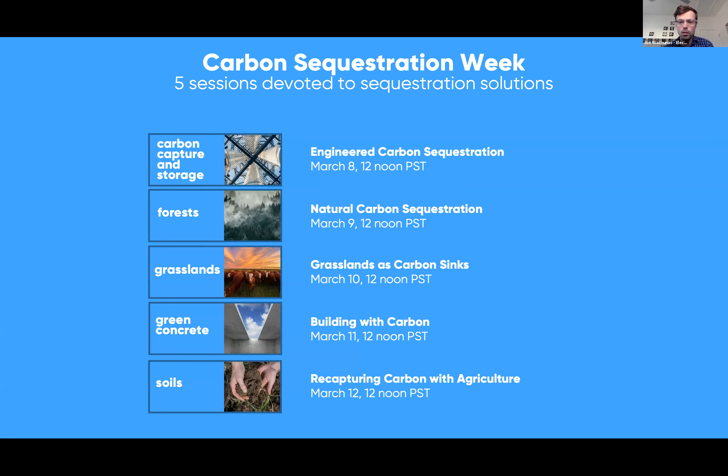I'm really excited about the panelists we have today. We've got two ready-mix suppliers pushing the envelope in terms of concrete technology. We have Michael Bernert, Vice President of Wilsonville Concrete Products, a local, family-run business experimenting with new ways of creating and delivering concrete to reduce carbon emissions. We also have Alana Guzzetta from US Concrete, the National Research Laboratory Manager, working on new ways to make concrete in service of reducing its carbon impact. And we have Alex Boetzel, Director of Operations at Green Hammer, also here in Portland, a builder doing LEED certified buildings and other green building techniques to lower energy consumption, increase efficiency, and lower embodied carbon. So I think we've got a good spectrum of speakers looking at things from slightly different angles, who can give us a great picture of what concrete looks like today and where it's going in the future.

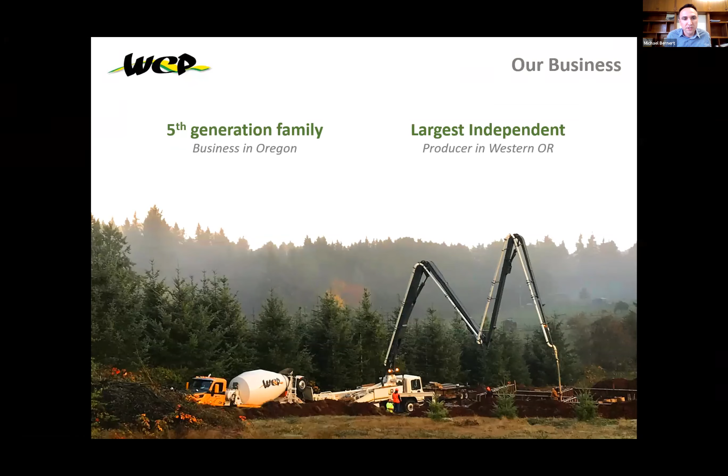Concrete is the most common building material in the world, second only to water in terms of human use, and it's everywhere. It's in our roads, our homes, our bridges. It's what supports our skyscrapers and our stadiums, and it's a versatile, strong, low cost, and long service life material.

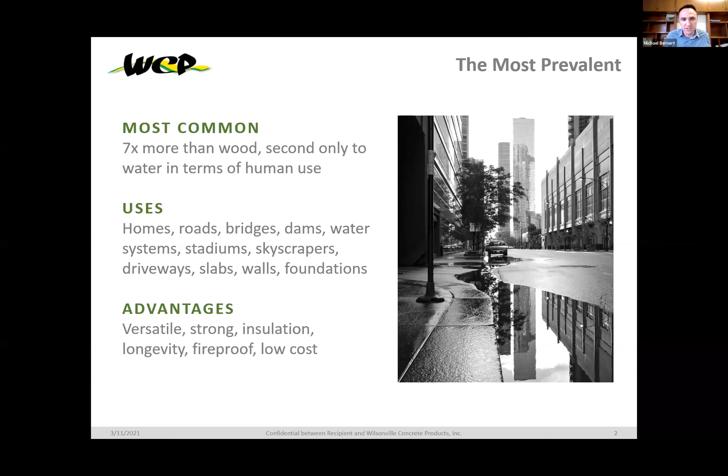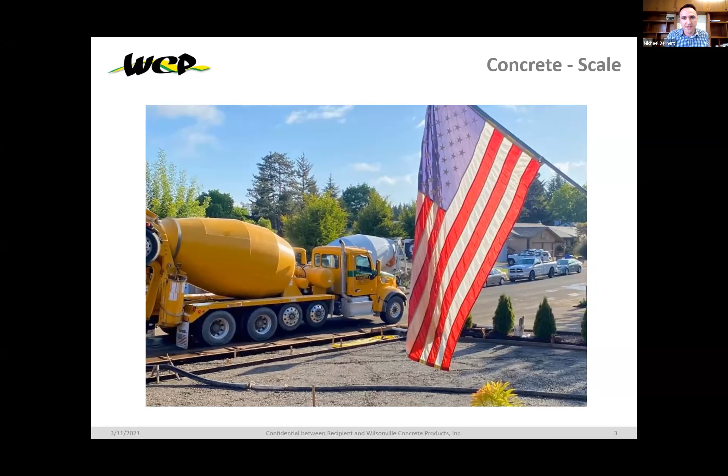Because of those advantages it's ubiquitous, and it's hard to explain the immensity of the amount of concrete we use globally. The easiest way for me to think about it is a typical residential driveway, about 640 square feet and a 4-inch thick slab. Every day, globally, we produce enough concrete to pour about 9.5 million of those driveways. That's enough concrete to cover the entire city of Portland, all the offices, sidewalks, roads, residential neighborhoods, trees, parks, and green space, in 4 inches of concrete. It's truly a mind-boggling amount, and that's just in a single day.

Globally, over a year, there's enough concrete poured to cover the entire nation of the United Kingdom. I can rattle off example after example, but it's a massive quantity of physical material.

Given that scale, it's no wonder concrete has a dramatic impact on our planet. About 70% of the carbon footprint from concrete comes from a single ingredient: cement. Cement is the binder that holds concrete together and allows it to gain strength over time. The manufacturing of cement alone accounts for somewhere between 7 to 8% of global human-caused carbon emissions.

So it's a huge part of the climate crisis, and that's why our producer community and others in the industry have a real need to take dramatic action quickly to reduce that footprint, and also look for opportunities to transition the built environment into a source of sequestration instead of a source of emissions.

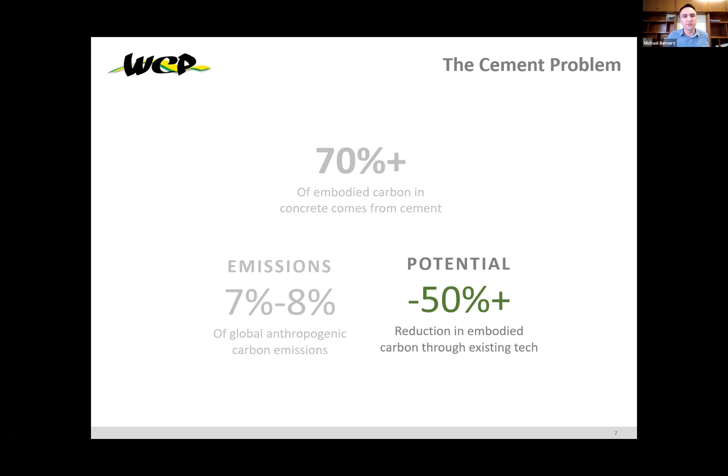We're going to talk a little bit about sequestration later, and I think Alana is going to touch on that. For now, I'm going to focus on the opportunities to reduce current emissions using existing technology. Through existing technologies available off the shelf today, there's the potential to reduce emissions by about 50%. So there's real promise in terms of tackling that 7 to 8% equation in the near term, and real opportunities in the long term to pursue some of these sequestration technologies.

Before we jump into the technology, I wanted to do a brief introduction on cement chemistry, which helps explain why cement has such a high carbon footprint. I have a disclaimer that this is a massively simplified explanation, so I apologize in advance to any engineers or chemists who may be participating.

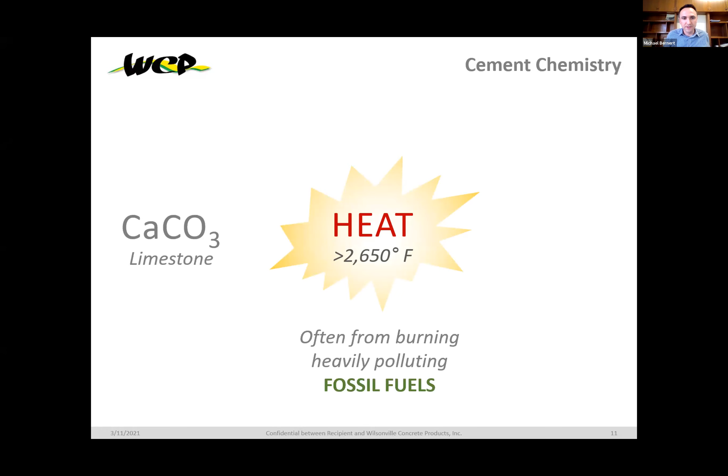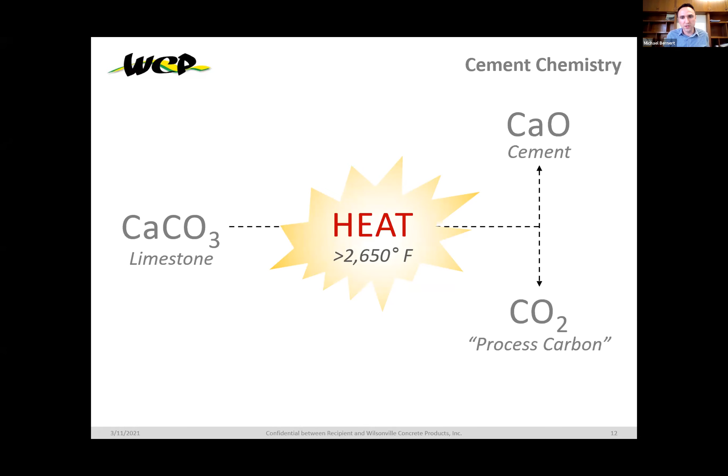At the simplest level, cement is made from limestone, or calcium carbonate. That limestone is heated up in a cement kiln to over 2,650 degrees Fahrenheit. Most of that heat comes from the burning of fossil fuels today, which is a significant source of carbon emission. The heat creates a chemical reaction which produces cement, but in order for that chemical equation to balance, it also creates what we call process carbon, even more CO2 pollution. So cement has such an outsized impact because of the burning of fossil fuels, coupled with the industrial process itself being a source of additional carbon emissions.

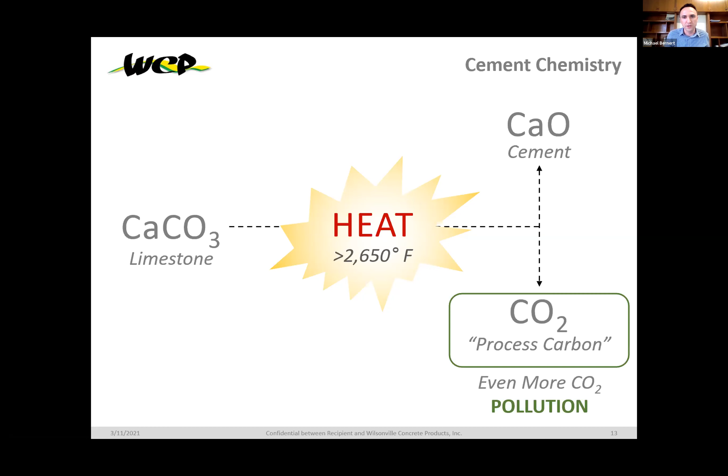As we look as an industry on how we can tackle that problem, we have to pursue an all-of-the-above approach, attacking emissions and looking for sequestration opportunities throughout the life cycle of concrete.

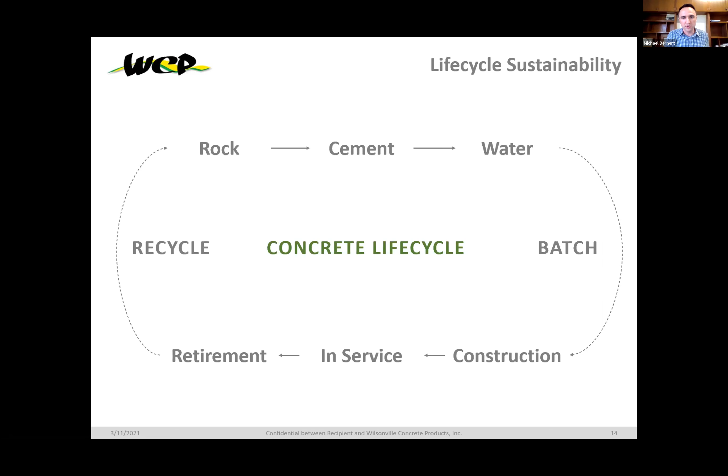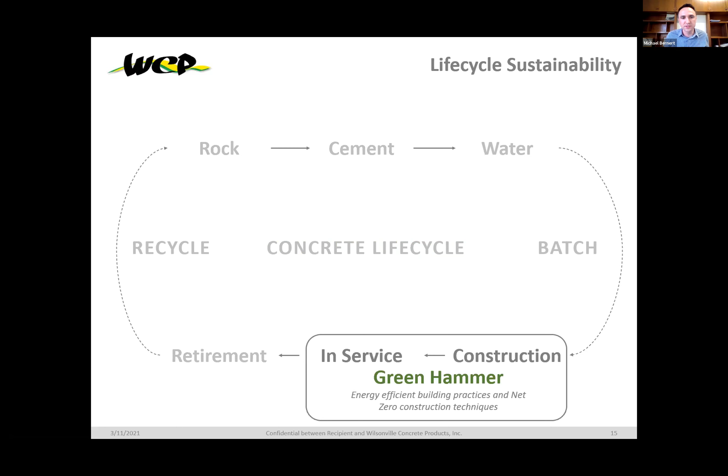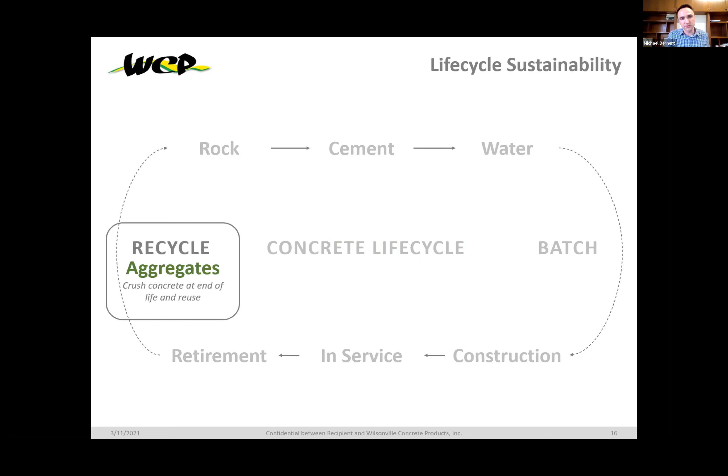Alex and his team at Green Hammer are experts in constructing structures and placing them in service in such a way as to reduce their carbon footprint. I think he's going to speak in his presentation about that area of the life cycle. There are opportunities through recycling buildings when they're being decommissioned to turn that concrete into new material to reduce demand, and we can recycle that concrete and turn it into new aggregates.

One of the opportunities that Alana is going to speak to is Blue Planet. Blue Planet is a technology where carbon dioxide is used to make synthetic aggregates, and then those synthetic aggregates are placed into the concrete—that's a true sequestration opportunity, which permanently sequesters carbon dioxide into our built environment.

Alana's also going to speak to Carbon Cure. Carbon Cure is an opportunity and a technology to inject carbon dioxide into the concrete batching process, and again, permanently sequester that carbon dioxide into the built environment.

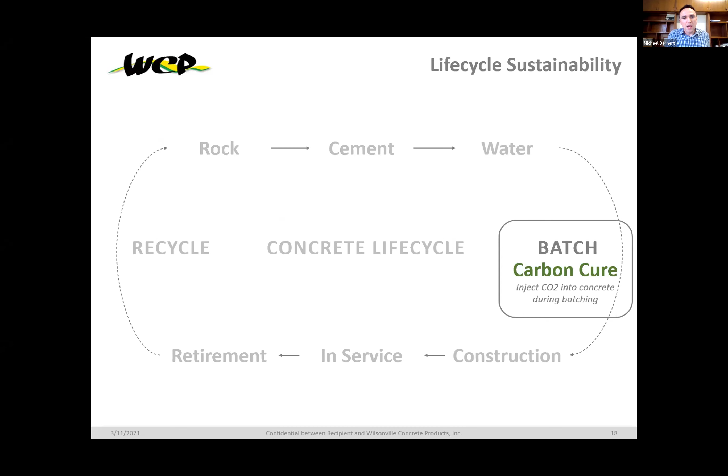Carbon Cure and the Blue Planet technologies are emerging and reaching commercial scale. In the meantime, there are things we can do today to significantly decrease the cement that's in our concrete mixtures. So taking cement out of concrete is one of our biggest opportunities to reduce emissions today.

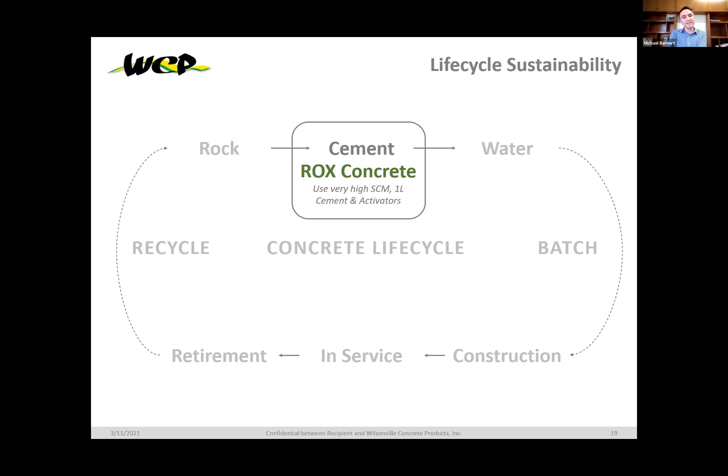In our company, we launched a product line called ROX Concrete, and it uses what are called supplemental cementitious materials, in addition to a very specific type of cement called Type 1L cement, to take cement out and replace it with supplemental cementitious materials.

We currently have two products that we sell. One is called Steel ROX, which uses a byproduct of the steel manufacturing process as the primary SCM, and it reduces the cement content by about 50%. I think Green Hammer uses this product in a number of their recent structures.

We're also starting field trials this year with a product we're calling Clean ROX, which reduces the cement content by 75%. It uses a slightly different technology called alkali activation to help those SCMs gain strength at such a high level of substitution.

Both of these products, and our entire ROX Concrete offering, are carbon neutral. This was a challenging decision for us to make in terms of, are we just paying to pollute? I'd welcome a discussion during Q&A about how to think about carbon offsets and how we came to the conclusion that it was the right decision. But that is part of where we're moving our company in terms of purchasing those offsets currently.

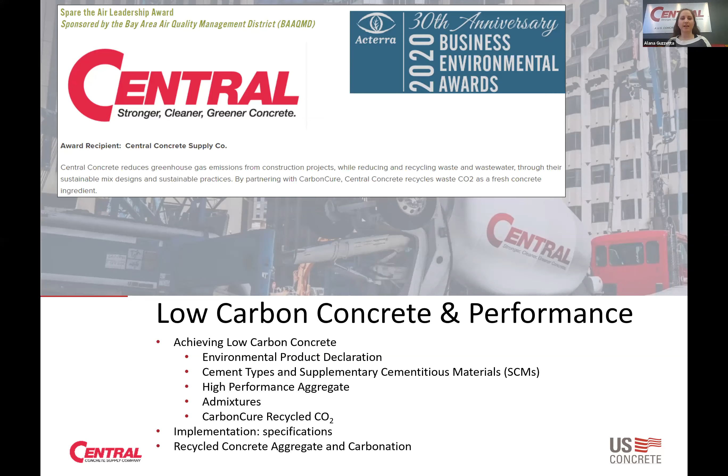That's specific to the mix design batched at a specific plant. As a ready mix producer, we have operations in different parts of the country, but say specifically in the San Francisco Bay Area, we have 19 different plants. What this takes into account are all the raw ingredients that are in the mix and what it took to transport them to the plant where the concrete is going to be mixed. So that's how an EPD is going to be specific to a mix design batched at a specific plant.

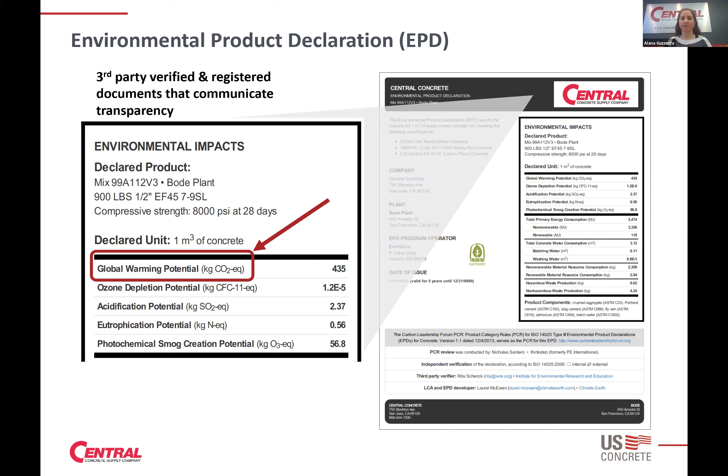So that EPD is taking into account what was the processing emissions for each of these ingredients, what was the emissions attributed to the transportation of these ingredients to the concrete ready mix producer plant, and then what energy and emissions go into mixing all together and producing the concrete at the supplier's plant. I'll be referencing this page to go through what the impact and the ability to lower the embodied carbon of the mix is for each of these ingredients.

Looking at the mix overall, this is a breakdown of the GWP for three different mixes, and looking at where the majority of that embodied carbon is coming from. As Michael said in his presentation, it could be about 70% comes from cement.

In this specific breakdown, we took a look at three different mixes. The dark gray bars are a 100% cement mix, meaning the only powder in the mix is Portland cement. The red bars are for a 15% fly ash mix, meaning 15% of the cement is replaced with a different powder we call fly ash, which is a byproduct of burning coal and a waste product that would otherwise be put into a landfill. The light gray bars are from a 50% cement replacement mix, where we're using a blend of supplementary cementitious materials that Michael talked about.

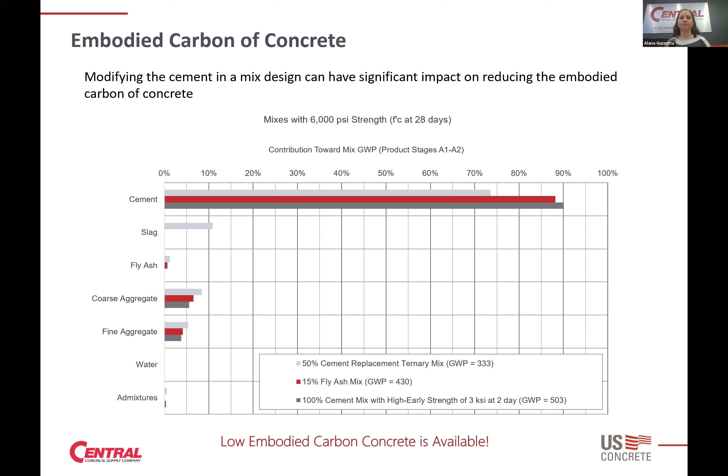With a 100% cement mix, where cement is your only powder, in this specific mix example, 90% of the GWP for that mix design comes from the cement. As you start replacing that cement, it becomes lower. So you're anywhere from about 70 to 90% of the embodied carbon in the mix coming from the cement. So if we take a first look at cement, what are our options for reducing the embodied carbon of the mix?

One thing is looking at the type of cement you're using. Michael talked about this, that they are currently using a type 1L cement, which comes from a different ASTM standard. A lot of the cement that's more common is an ASTM C150 cement. Different parts of the country use different types. Specifically in California, we're using a type 5 cement, where the chemistry is such that it can be more resistant to sulfate attack.

If you have a cement that meets C150, it can contain 5% limestone, meaning limestone that has not gone through the kiln and is blended in with the cement product that has been processed through a kiln. But a C595 cement is a blended cement, so that allows for a higher amount of limestone, up to 15%. Commonly we see cements having 13 to 14% limestone. This reduces the embodied carbon of your mix by about 7 to 8%. If you're taking a C150 cement and pound for pound replacing it with a C595 cement, that's going to result in about a 7% reduction in your GWP for the mix.

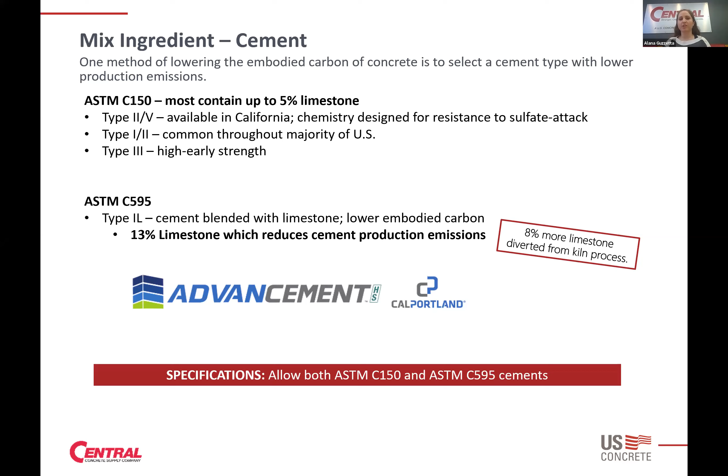So then moving next into the mix design, the supplementary cementitious materials - these can be a variety of products. They're just different powders that can replace the cement in the mix. We'll go through some of the options there.

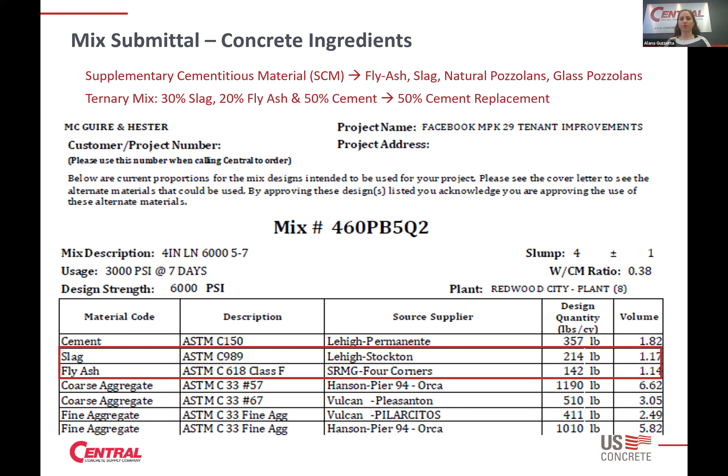But first, understanding - going back to that chemistry equation that Michael was talking about - the calcium silicates are coming from your cement and they're mixing with water. That chemical reaction is called hydration. What you get as a result is something we call CSH, calcium silicate hydrate, which is that strong paste product that's holding everything together, holding the rock and the sand and all the powders. That chemical reaction is what makes it go from a liquid state to a hard concrete and build strength and density of that material. A byproduct of that reaction, also mixed in with that paste, is free lime or calcium hydroxide.

The benefit of supplementary cementitious materials is that some will have a little bit of reactivity with water on their own, but the majority of what they're doing is reacting with that calcium hydroxide, that weaker product, reacting with that and water to form more of that CSH, or that strong part of the paste. So that's going to increase the strength of your concrete and also make it more dense.

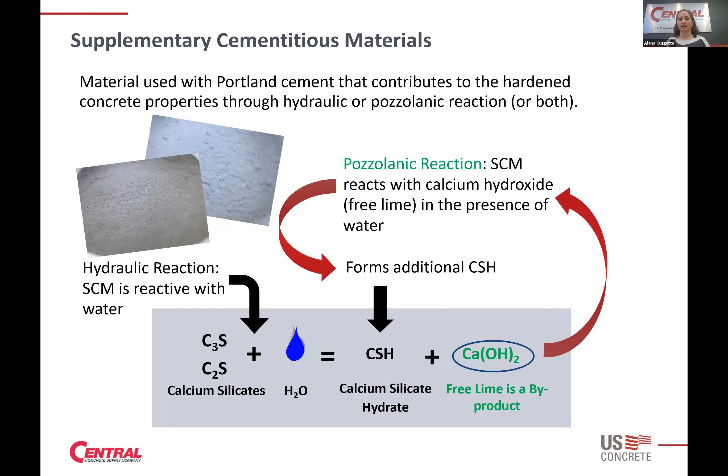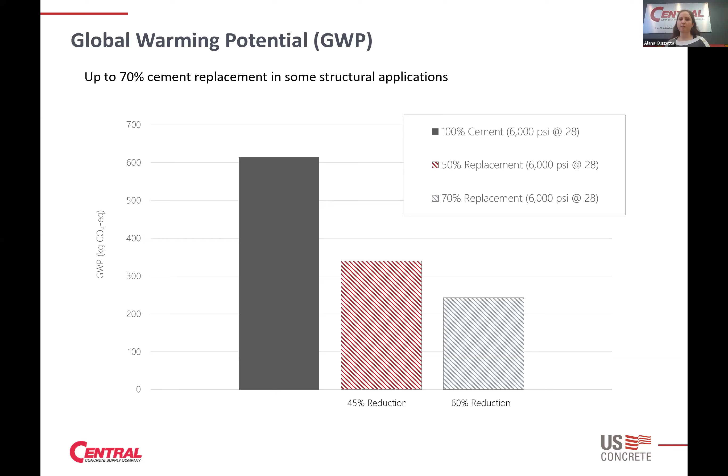In an example of how embodied carbon can be reduced with these types of products: this is a 100% cement mix that achieves 6,000 PSI at 28 days, with a GWP of just over 600. With a 50% cement replacement mix achieving the same strength, there's a 45% reduction in the GWP. With a 70% replacement of cement at the same strength, we were able to achieve a 60% reduction. These are mixes we're able to use out on the market in the San Francisco Bay Area, also in our East Coast operations today.

This is an example showing field compressive strength, where the gray bar is a mix with a higher GWP - 15% cement replacement - compared to the red bars, which is a 45% cement replacement mix with a lower GWP. With this, you're seeing that we don't have to sacrifice performance of the material in order to have this lower embodied carbon concrete.

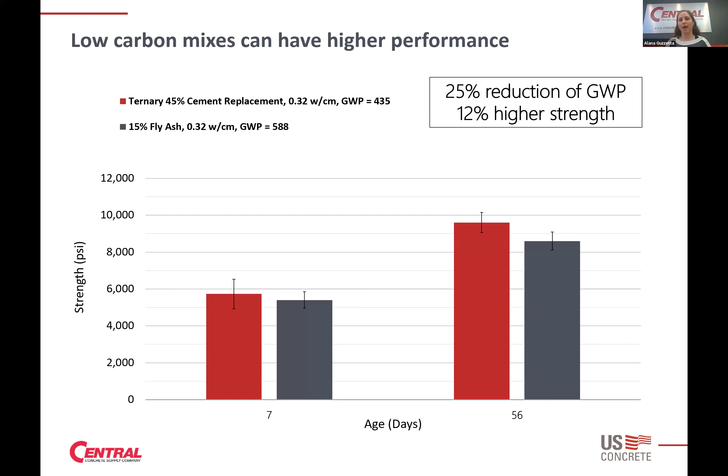Supplementary cementitious materials very commonly today are fly ash and slag. Slag is a byproduct of steel manufacturing, as Michael mentioned. One new one available on the market now is glass pozzolan, which has a new ASTM standard specifically for it.

That standard just came out, I think it was about last year, maybe 18 months ago. The only glass pozzolan source that I'm aware of right now is in the New York area. It's something we've used in the lab for the last 5 years or so.

In New York, we've used it successfully on several projects and used it in combinations with other supplementary cementitious materials.

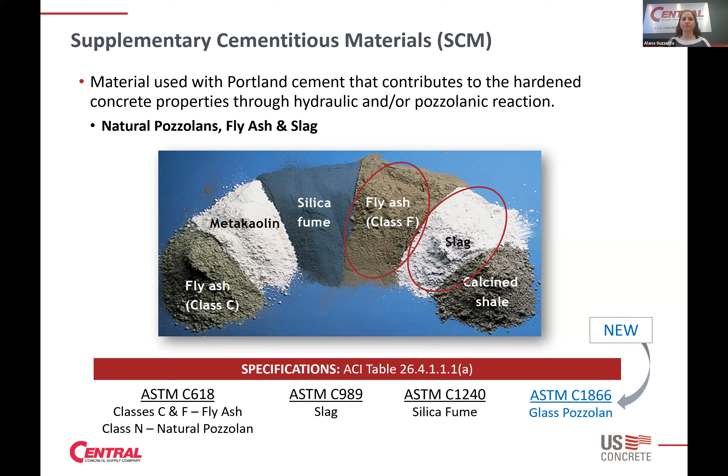You're going to find that about 60 to 70% of the volume is made up of your aggregates, your coarse and your fine together. So while cement is a significant portion of the embodied carbon, the aggregate is a significant actual product in your concrete mix.

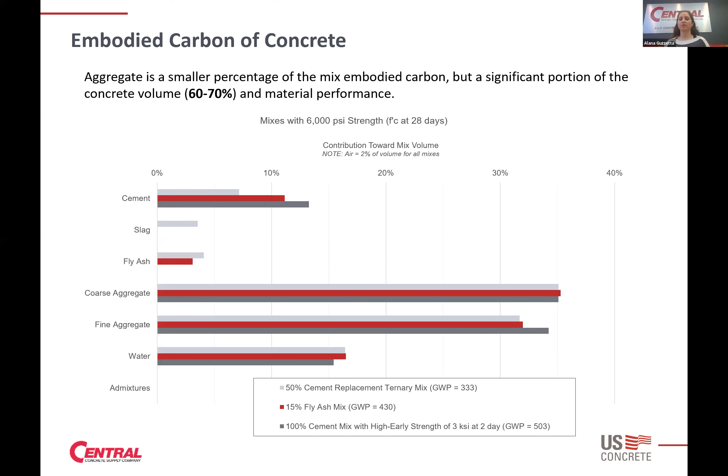There are a variety of different aggregates available and a variety of different reasons you would choose them. You can have high strength or high performing aggregates, which means you're able to achieve higher strength concrete, lower shrinkage, which is important for helping to mitigate cracking potential.

And then also have a higher modulus of elasticity, or a higher stiffness of the concrete. Your typical standard gravel aggregates, local to our area, are going to achieve 3,000 to 5,000 PSI concrete, and you'd go to the higher strength aggregates for anything above that.

There are also lightweight aggregates available for reducing the weight of a structure, reducing the weight of the concrete. There are different options available. A natural lightweight, something like a pumice or a scoria, is going to have a lower embodied carbon than a manufactured lightweight.

Manufactured lightweights are things like expanded shale and expanded clay, and those are manufactured by going through a kiln process. So that's what gives them a higher embodied carbon.

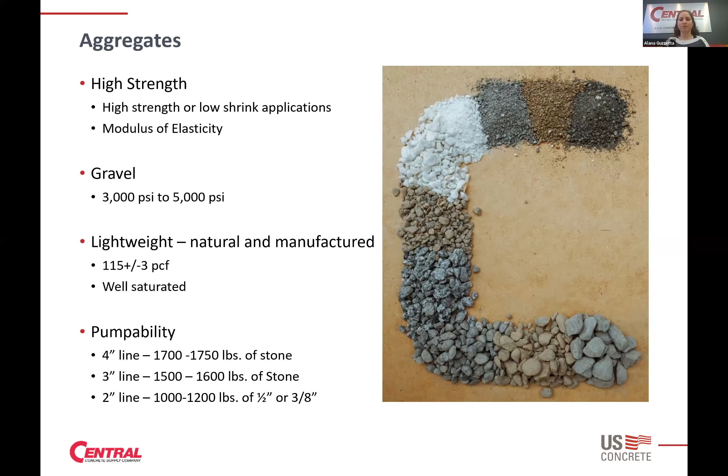And what you have available in different markets is going to vary based on your location and the sources you've got close by. But those are conversations you can have with a ready mix supplier.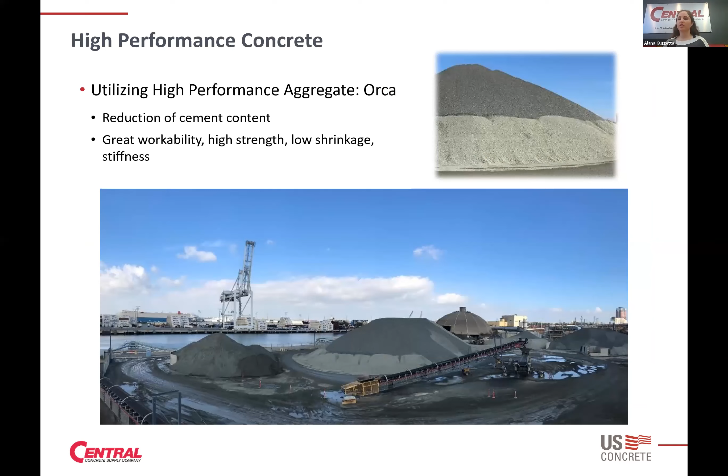A specific type of high performance aggregate is Orca. This is a US concrete aggregate that we have out of British Columbia, Vancouver. And this is an example of what we're able to do with that.

We're able to get cement efficiencies with this type of aggregate, and better efficiencies mean that we can lower how much cement is in the mix. And if you recall from previously, the cement has the highest embodied carbon in the mix.

So being able to lower how much cement content you need in the mix is going to further reduce the embodied carbon of your mix.

For the example you see here, there are three different types of mixes. We've got one example with our Orca aggregate for each one of those, which are the red bars. And then the black bars are a local kind of standard quality gravel.

What you can see is that we're measuring cementitious efficiency in terms of PSI per pound. And we're above 10 PSI per pound by using the Orca aggregate.

We're within the 8 to 9 PSI per pound range with a different aggregate. So with that, the Orca mixes are going to require less cement to achieve the same compressive strength.

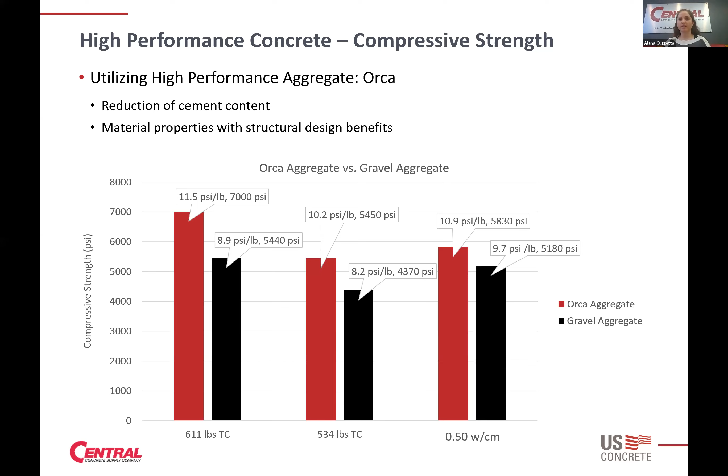So the next on the list are going to be admixtures. This technology has been developing over the decades, and some of these technologies have been around for a while and been very commonly used.

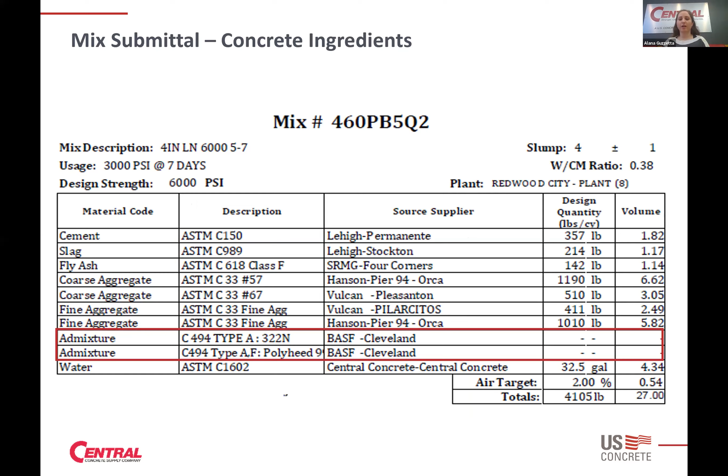With admixtures, you're also able to improve your cement efficiencies as well, that PSI per pound, and you can reduce the amount of water that's needed in a mix.

And there are even newer admixtures on the market now that actually help to give a strength boost. So that's another way to achieve the strength you're looking for and do it with less cement in the mix.

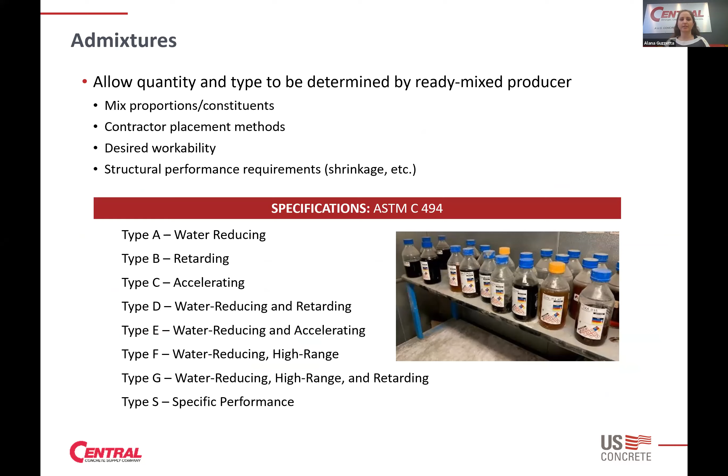As Michael mentioned, CarbonCure is the newest technology or ingredient we have to work with in ready mix concrete. CarbonCure is a technology that injects recycled CO2 into the fresh concrete. This is the first technology available to inject CO2 into ready mix concrete.

We have this in both our San Francisco market as well as our Washington DC market, and we've been using it for a couple of years. A great benefit is that it's not going to change the appearance of the concrete to the contractor, so the workability and everything you see as a fresh property stays the same.

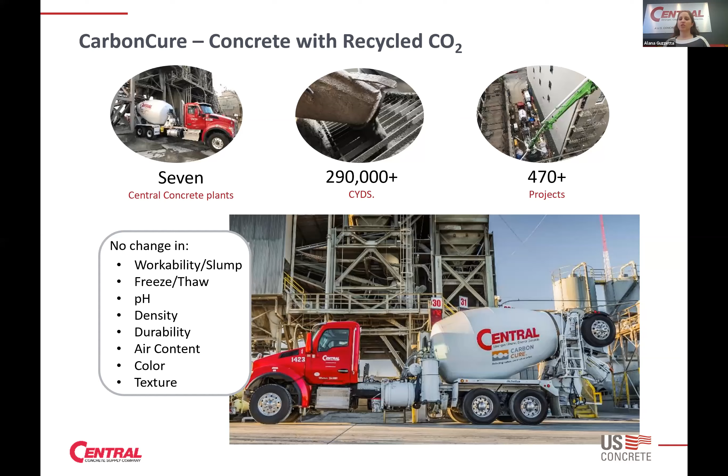The way it works is when you inject the CO2 into the concrete mix, it turns into carbonic acid and reacts with calcium ions from the cement, forming very small size calcium carbonate - that's what Michael talked about as limestone. These very nano-sized limestone particles help promote the hydration to react a little more early on, and at the right dosage, give a strength boost to the concrete. With a strength boost, you have potential to further reduce the amount of cement in the mix.

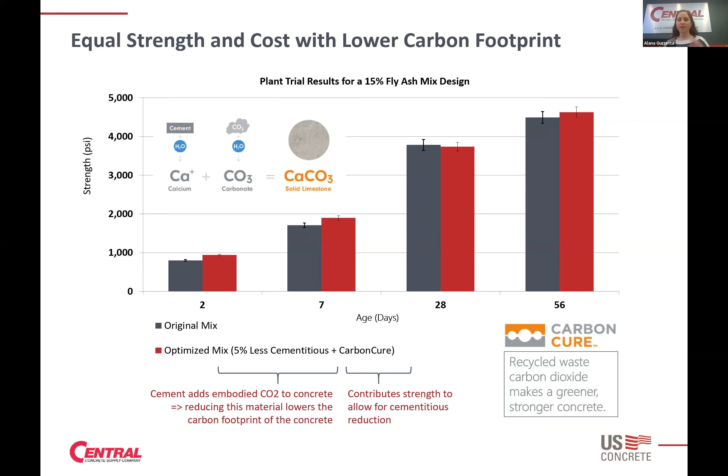This is something we've done successfully in both of our markets. Particularly, we have it available at 7 different plants in the San Francisco market. In 2019, we were able to do a mat slab delivering out of 6 different plants for over 7,600 yards in just under 11 hours, producing at a rate of 750 cubic yards an hour.

The amount of sequestered CO2 is about 0.5 pound to 1 pound per cubic yard. With this, we're able to look for opportunities to optimize the mix and further reduce the amount of cementitious material.

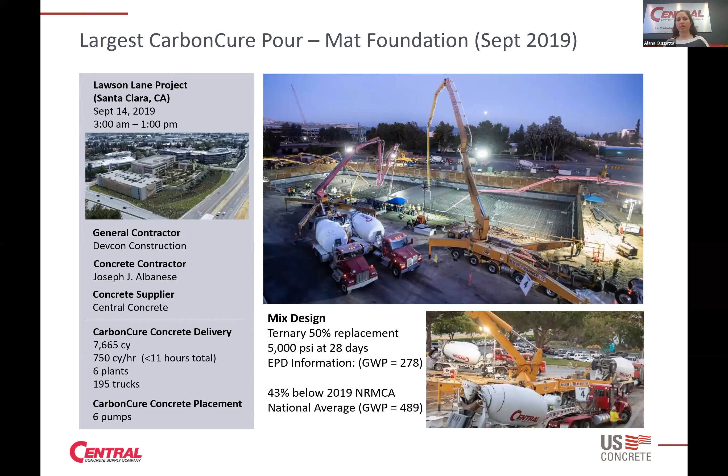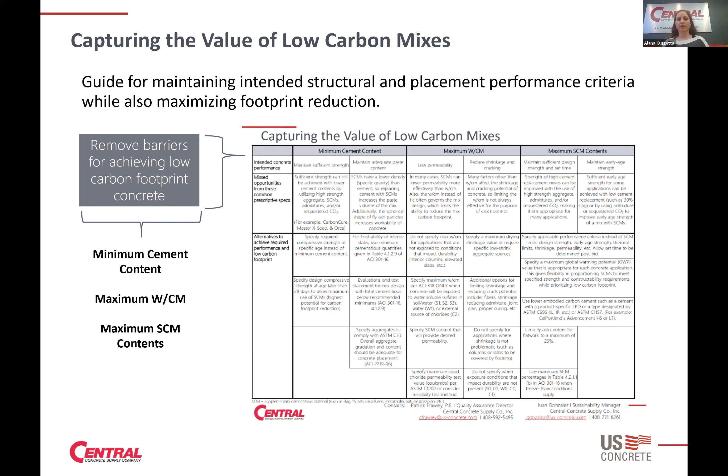This shows an example of water cement ratio. If that's limited at a pretty low number, lower than what's needed for the strength required, you're actually pushing up the embodied carbon of the mix, unnecessarily in a lot of cases. This shows 4 mix examples at a 0.45 water cement ratio, and when you look at those same 4 mix examples at a 0.50 water cement ratio, there's about a 7 to 12% reduction in the embodied carbon of those mixes.

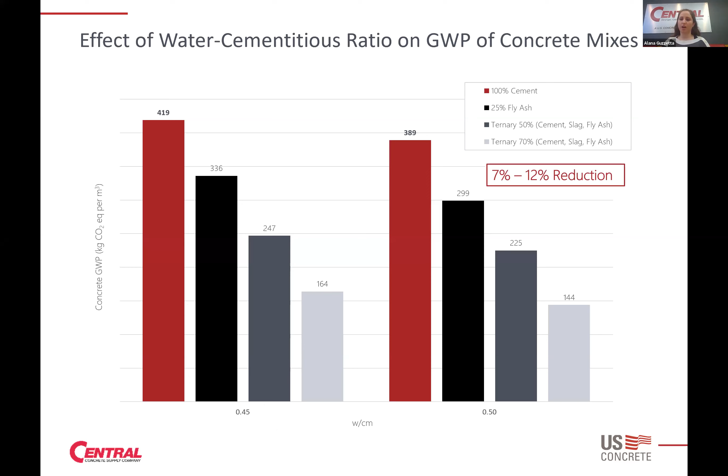With recycled concrete aggregate that Michael mentioned, this is another benefit to concrete in that when there's a waste material or leftover product at the end, it doesn't necessarily have to go to a landfill - it can still be used in a variety of ways, and one of those ways is recycled concrete aggregate.

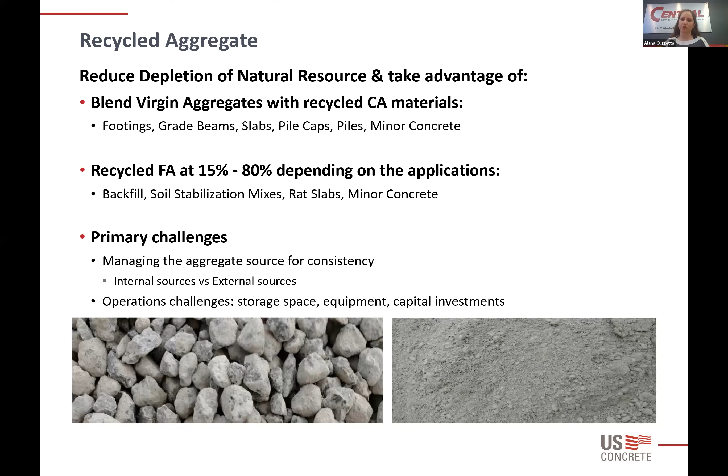One of the challenges is managing the source, so you get a little more variability in that type of aggregate, and making sure you're managing that to have predictable performance in concrete is important. Concrete can be turned into recycled concrete aggregate, either as demolished concrete from a structure or as fresh concrete that gets returned, left over from a project, that can be laid out on the ground when it comes back to the yard, then taken and crushed into an aggregate to be used in a new concrete mix later on.

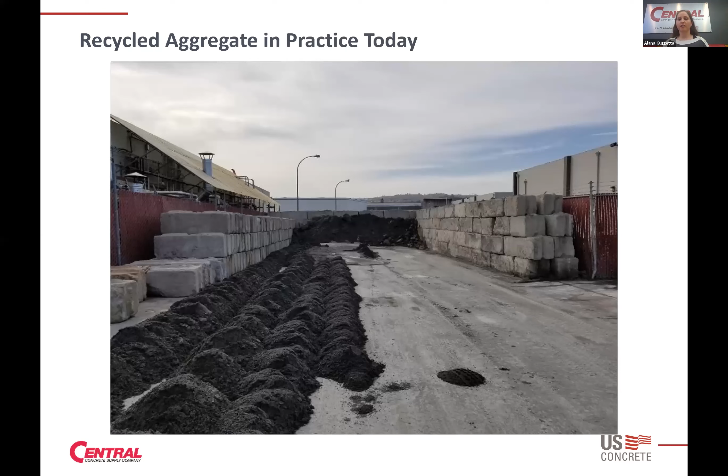This shows the variability you can get with recycled concrete aggregate - some pieces will have a high mortar content, some will be loose aggregate loosened from the crushing process. Making sure you're managing the source, as long as you're doing that well, it's something that can definitely be used into new concrete with a lot of good quality.

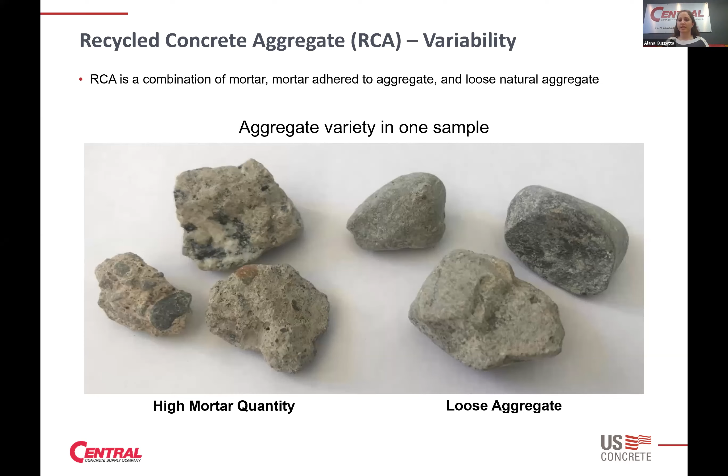Also, concrete naturally, when it's hardened, will absorb CO2 from the atmosphere and produce a carbonation reaction. So concrete itself also sequesters CO2 from the air just naturally, and when you take it and crush it into an aggregate like this, that exposes more surface area and helps draw even more CO2 out of the environment.

This is a summary that I'm happy to share with anyone, showing where different strategies we've talked about today work best for different applications. The importance of this slide isn't necessarily the specifics, since those vary by market and ready mix producer, but how important communication is between the ready mix producer, the design team, and the contractor to put together a mix design that's as low carbon as possible while achieving the structural properties needed by designers and accommodating the contractor's schedule and placement needs.

So with that, going into the contractor's piece, I want to hand it over to Alex.

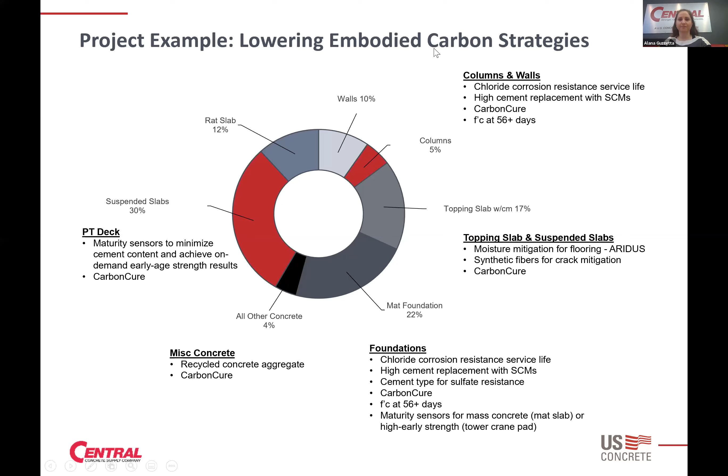All right, well thanks Alana and thanks Michael. Let me cue up my slides here. Obviously there was a lot of technical information, awesome information in there, and most people are going to want to review the slides afterwards to make sure they really catch all of the detail.

The perspective I bring is that we talked a lot about reducing the carbon footprint of concrete, and as we're waiting essentially for a lot of the carbon sequestering opportunities to come out of the labs, I wanted to bring the perspective of our practice. I'm with Greenhammer, a small design build firm in Portland, Oregon.

To bring this into context with embodied carbon, I wanted to take a little time to talk about operational carbon, which is really what most people have in the past looked toward reducing carbon emissions. So what we've built are projects like these, small multifamily projects that are zero energy.

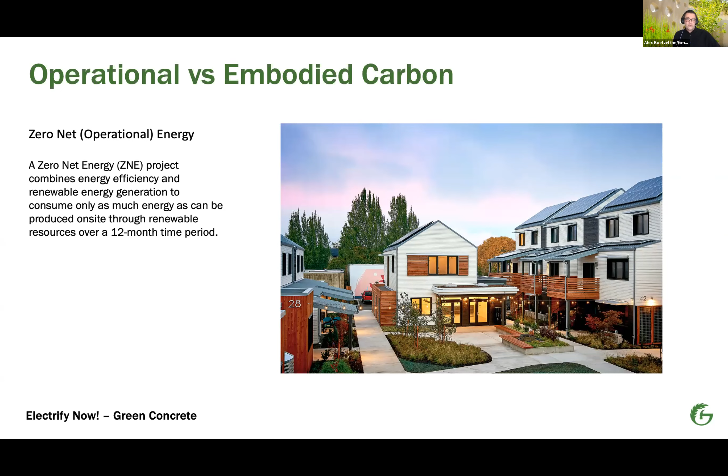Here's a little definition: the projects produce as much energy as they use over the course of the year, really dramatically reducing operational carbon essentially to zero.

So how do we do that? Just real quick, we build a high performance enclosure, we use high efficiency systems, and then on-site renewables take care of the rest.

In addition, we're looking at policies that local jurisdictions like the City of Portland and Multnomah County have, to decarbonize the grid. So pretty soon our operational carbon is going to go to zero.

And this is where the embodied carbon of materials becomes more and more important. Initially we were thinking to focus on operational carbon, which we did, and we had huge successes. So this is really our next frontier in a practice like ours.

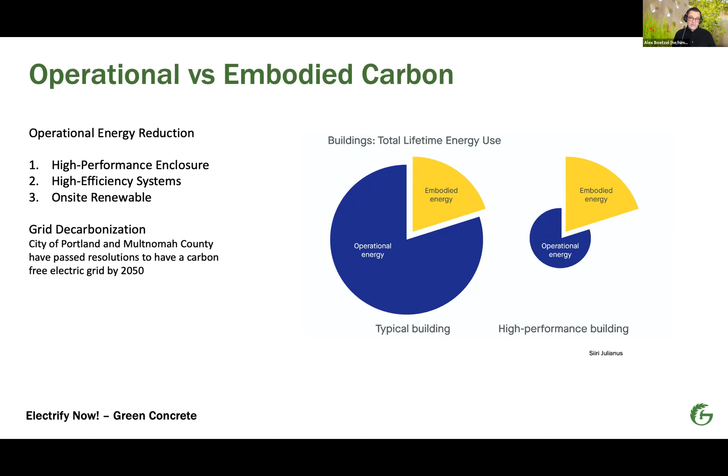What that means is we were really interested in looking into how our buildings perform in terms of embodied carbon. You can imagine that for zero energy projects there's additional embodied carbon, from additional insulation materials and a PV solar array.

We were interested in this idea that we're really shooting for zero emissions by 2030. So obviously a building like this is going to save energy over its lifetime, which might be 100 years or more. But what we discovered in this analysis is that a zero energy building actually shows carbon savings after just a year compared to a code building.

So that was encouraging, that our additional effort to create a zero energy building doesn't take 10 or 20 years to pay back, so to speak, in embodied carbon. But as we've been talking about, concrete is still our most carbon intensive product.

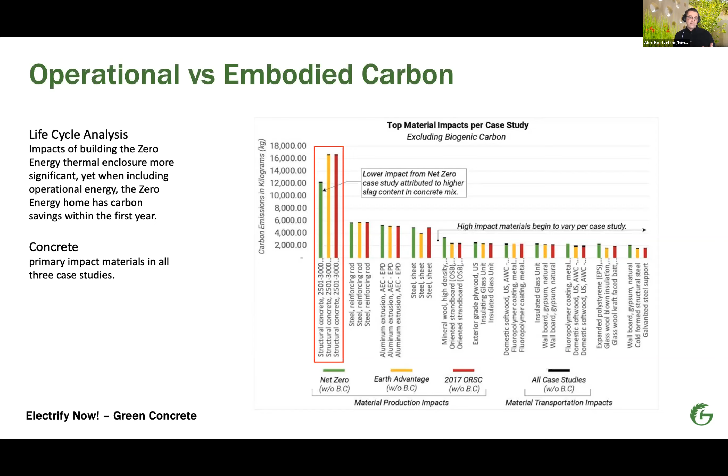So what I want to talk about, and maybe this applies to somebody else's practice too, is how do we make that change? What are the implications in the field?

What we're finding important is that we have to find the right partners. If you talk to your concrete suppliers, you have to talk about your goals, and bring the supplier into conversations like the one Michael and Alana just had, because they can really inform the conversation.

Ask for SCMs—that's the term of the day, I guess—and ask for EPDs. EPDs are important; as Alana was saying, they're like a nutrition label for materials and embodied carbon.

So please ask for those materials. There are other materials you can start asking for. Not every industry has these available yet, but if we ask for it, we're going to get more of those.

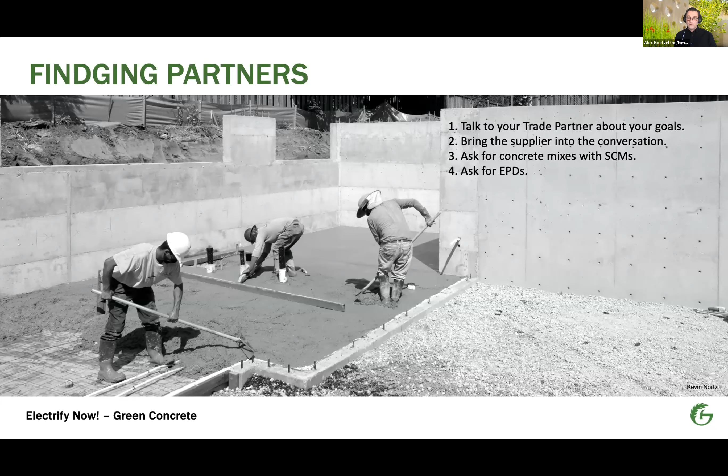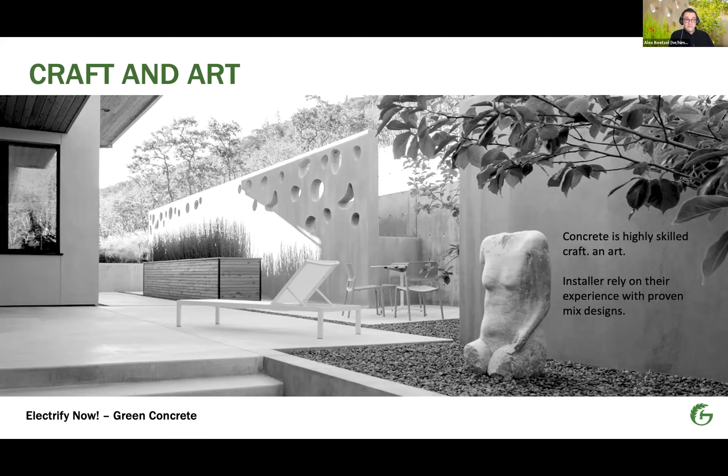One thing that's important to point out is that there's an art and a craft behind installing concrete. This might sound flippant, but changing the mix design of a concrete could be equivalent to changing the family recipe on a holiday dinner. They have decades of experience with certain mixes, what they can do, how they perform, where their strengths lay. So changing specifications is going to be important, but there will be hesitation from trade partners to change their practice. This is going to be a slow educational process, and it has to be collaborative to really change the industry.

The other way this impacts our concrete trade partner has to do with time. Some of these mixes perform a lot better over time, like Alana was illustrating so well just before. But there are also aspects, particularly for smaller projects and smaller concrete installers, that really matter.

For example, form removal times. Some concretes might be stronger over time, but the initial strength that you get over 24 or 48 hours is lower, which means they have to plan on removing forms later. Concrete installers might rely on moving from one project to the other, so if they have delays, that has to be factored in.

The other one that's fairly important in our experience has to do with flat work. So the driveway that Michael was talking about, concrete slabs and others, are a very specific installation, and those have to be protected. Now that we're reducing cement, the behavior is different, the installation process is different, and the finishing process is different. Again, those are things that need to be discussed.

We actually placed samples with our trade partners to increase confidence in the product. Those changes don't happen overnight, but it's important that we have these discussions right now, because we have the opportunity to reduce the embodied carbon in concrete by 50% or more today, and it's not common practice yet. So we have to ask for it in order to change that industry.

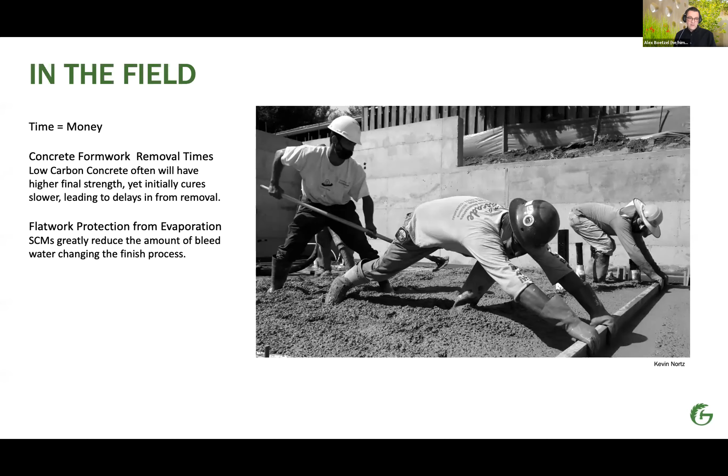Similar to the slide I showed in the beginning, we're reducing operational carbon and turning now to embodied carbon. The same can happen once we reduce, like Michael was saying, the embodied carbon due to cement by 50, 70% or more. Some of these technologies make real sense.

This is really mostly what I had to say, from the perspective of us and how to actually get to include these products. I hope we could start our conversation around these alternatives. Some came up - Blue Planet in terms of aggregate, alkali activated slag concrete. One product I wanted to specifically point out, because it was new to me - thanks to John Mead for pointing it out to me last week, a colleague here in Portland - is biochar, a product that can also help sequester and strengthen. So the opportunity here is really to combine sequestration with an improved concrete product.

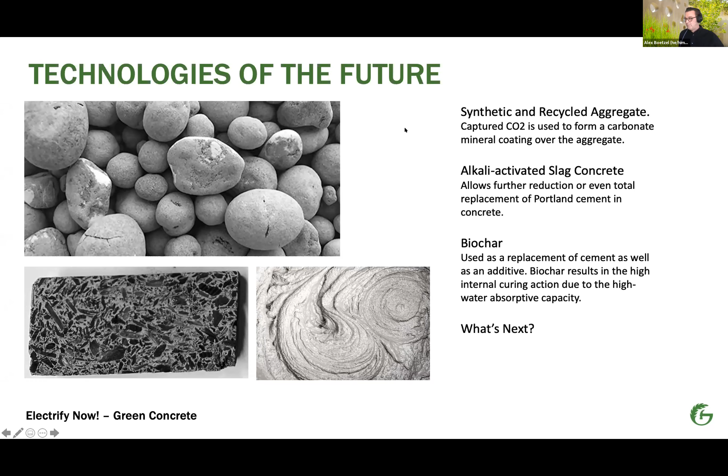We'll stop sharing now and hope we can have that conversation around those products. Michael and Alana, you have those products in your laboratory - when do you see people like us being able to have access to those products and implement them in our products and our projects?

From what I've seen in my experience, Blue Planet seems like one of the closer ones. What's interesting is that it's taking CO2 and sequestering it onto an aggregate. They have a couple different technologies: they can coat an existing aggregate with calcium carbonate made from the CO2, or produce a brand new aggregate from scratch with all of that CO2. Aggregate is a really big volume within concrete, so it's got really high potential to sequester a significant amount of CO2, potentially to the levels that bring it to zero or negative. That's something we've worked with in our lab with them, and it's an exciting one that's coming out.